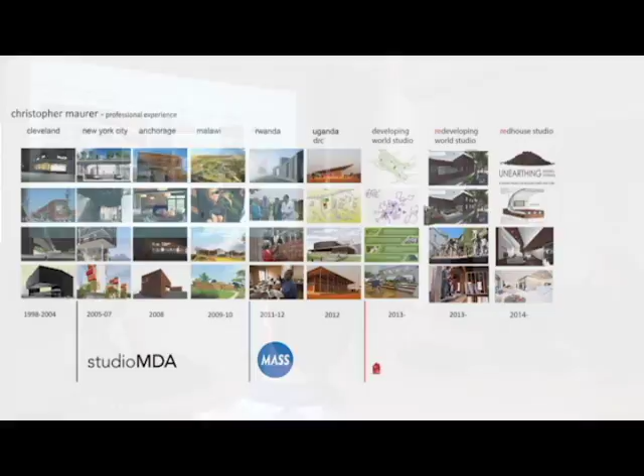My trajectory came from Northeast Ohio. I spent about 6 years in New York City, but worked on some major projects that took me out of the city, from Anchorage, Alaska to Lilongwe, Malawi, and a lot of places in between.

This is the timeline here where I studied at Kent State University. The major thesis project was a design for the MoCA museum that's now been built, not with our design unfortunately, but with somebody else's.

Then in New York City, at studioMDA, I worked for Markus Dochantschi, who was a protégé to Zaha Hadid. He started his firm in New York City in about 2002, I think, and I was there from 2005 to about 2010.

We did some projects in New York that were high-end galleries, low-income housing, and some work that actually took us to Africa. That really developed this sense of interest for me to work in the developing world.

So I took a job with Mass Design Group as their director for their Rwanda office, and we did several projects for organizations like Partners in Health and the Clinton Global Initiative and others like that.

Came back to Cleveland, started the Developing World Studio at Kent. I talked to Dean Steidl and Associate Dean Willoughby, mentioned my work in Africa, and they thought it would be a good opportunity to have a studio based off of developing world issues.

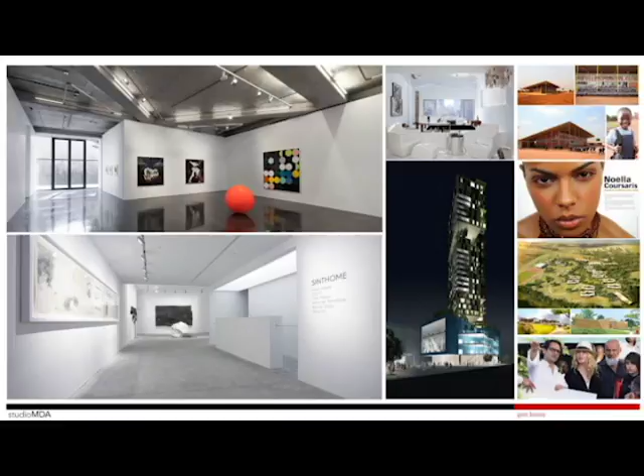And then the work that we did pro bono was usually based around marketing the firm or networking into celebrity causes. You can see Marcus here with Madonna on one of our projects in Malawi, where she was going to build a boarding school similar to the Oprah Winfrey Academy. The top project up here is the Malaika Foundation school for girls that was built for Congolese supermodel Noella Coursaris. So there was a real intentionality about some of the projects we picked there, and even though they were done for free and completely pro bono, they were done in a way that kind of augmented publicity, and that was one of the main reasons for doing that.

At Mass Design Group, the pro bono or the humanitarian impact kind of work was the mission, so that was the basis for design.

With studioMDA, there's a clear break between what's high pay and pro bono. With Mass Design Group, there's a gradation, because we collected fees for all projects. It was important that people understood there was value in the design, so there had to be payment, but most came from developed world partners who had more money to spend.

The ethos here was based on what Paul Farmer did with Partners in Health, which was our fiscal sponsor. In the book Mountains Beyond Mountains, Paul elucidates his concept of the preferential option for the poor, from liberation theology. The idea is that the poor are so commonly marginalized that when we work for them, we should give them even more effort than our developed world partners, because they deserve the respect, and we need to innovate with limited resources to make their lives easier.

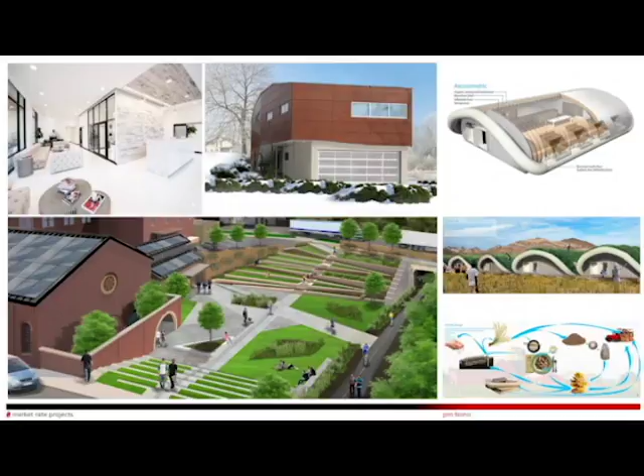So that brings us to Redhouse Studio. I started Redhouse a few years ago. We're now 4.5 people, 4 full-time and 1 part-time. Our market rate versus pro bono projects are on a gradation, but to keep the wheels turning we do have to do more market rate work. In our research we try to promote super sustainable technologies, and even though some of these projects aren't paying yet, we have hope the research will pay off. It's an investment in the future, for good reasons, for a better cause.

So that leads to the topic of the day: designing with limited resources.

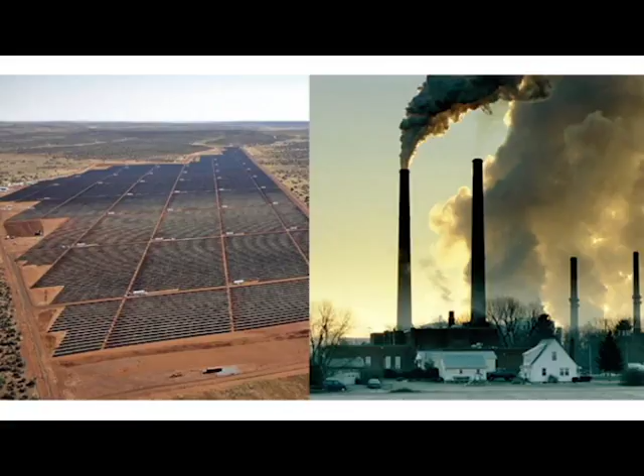In the developing world, there's also opportunity for leapfrogging into new technologies. We have infrastructures like the grid that require large-scale infrastructure to feed our homes and businesses, and factories running on coal and fossil fuels for a long time — not utilizing them would be a huge cost. But when those plants or the grid don't exist in the developing world, there's more capacity for jumping past old technology straight to the new, using renewable resources, ideally off the grid, so you wouldn't even waste the energy that goes into the grid.

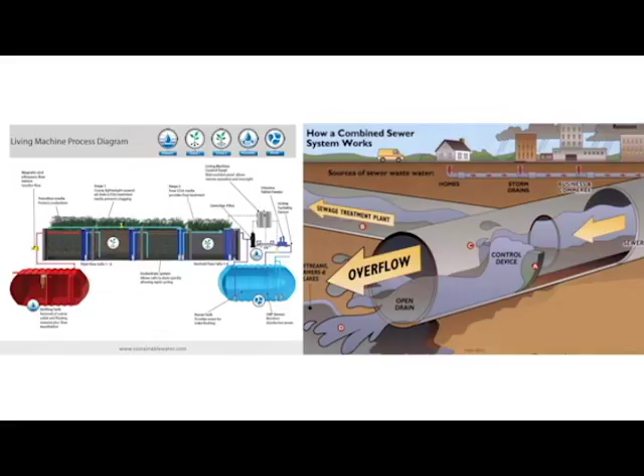Same thing with sewage and water collection. Because there's no grid, no systems like here in Cleveland where we have CSOs that dump sewage into the lake during major storm events — if we decentralize that treatment and do it biologically, like the living machine you see here, we enable the capacity for not polluting rivers and streams, doing things a bit lower tech but in a way that's useful and more sustainable.

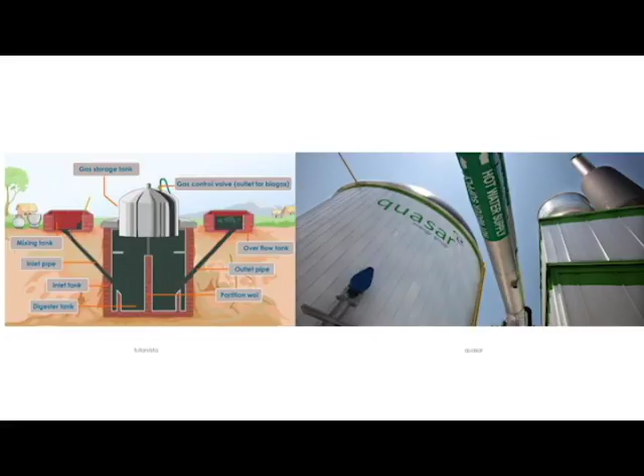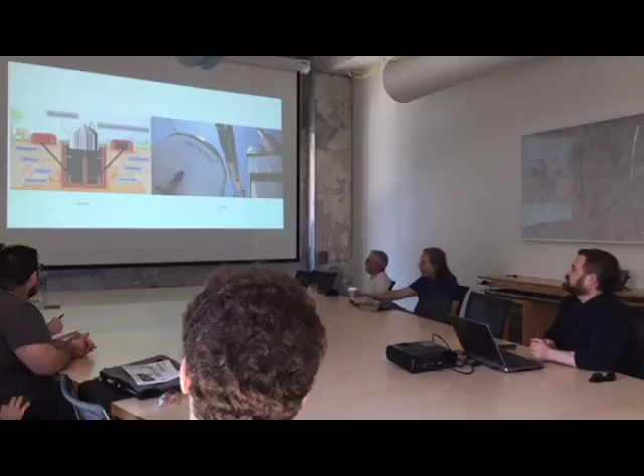We've seen a lot of biogas projects too in limited resource environments, whether rural America, Africa, or anywhere really, that are starting to inform how we produce energy here in the U.S. Quasar is a company in Ohio producing energy from biological waste. Some major numbers to consider: 40% of the world's carbon emissions come from the building industry, according to the U.S. EPA.

534 million tons of construction and demolition waste go to landfills each year in America. That's enough to be 10 pounds per person per day. So every American is throwing away 10 pounds of rubble a day. A room like this with 30 some people in it, that's 300 pounds a day basically.

So I guess the point I'm trying to get to is looking at these limited resource environments and bringing that back to the developed world. I think we need to do that all the time. We need to use that innovation that we aspire to in limited resource environments and apply it to environments that we consider to have many resources. So the point here is that all resources are limited.

The way that we're building, the way that we're using materials and discarding them, is leading to an age of the climate refugee.

In the developing world, that looks like people being displaced because they are not able to reach food resources or the normal necessities of life. In the developed world, you see people barricading themselves. More and more we see that in the United States too—the calls for walls to keep out foreigners, immigration bans to keep out foreigners, to protect the resources we have, whether that be jobs, or in Northeast Ohio, in the Great Lakes region, where we have 20% of the world's supply of fresh water. Areas that do have lots of resources are positioning themselves in this armed lifeboat position, where they have to protect the resources they have.

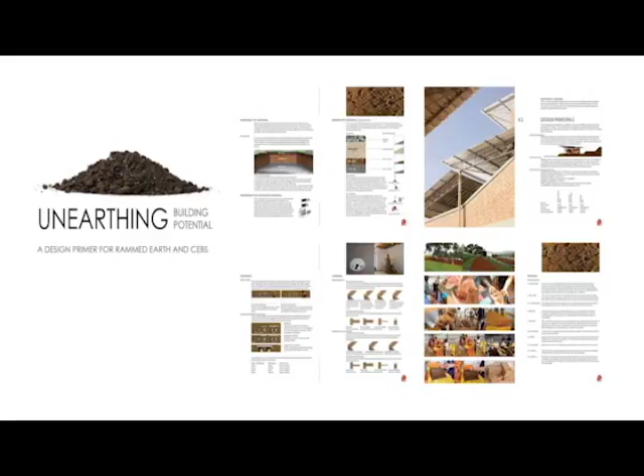So one material I had been looking into, and have written on—this is a manual I wrote for designers like yourselves to work with rammed earth or compressed earth blocks, citing some of the projects we worked on in Africa—and it gave design guidance, soil guidance, and testing of materials guidance for people interested in designing with it. This is a very low resource material. You basically use the earth right under your feet, and in many cases you can just manually compact it to the state you need to build with.

I enjoyed working with it in non-seismic areas. It's actually a really good product, but too many times we try to build with it in seismic areas, and then you have to reinforce it with concrete. It's very bad seismically, and it's not very good thermally either. So I kind of left that lead and moved on to other things.

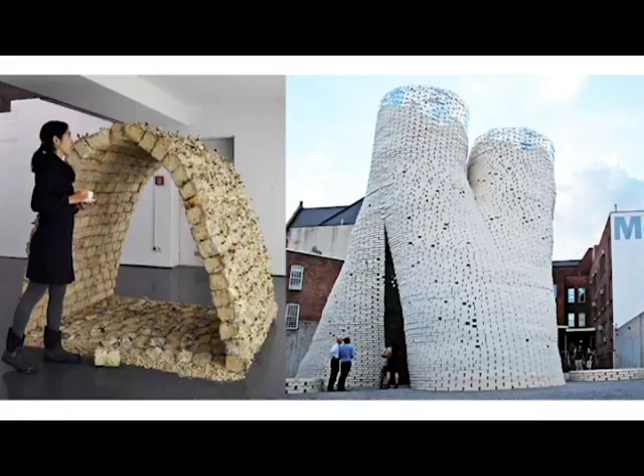Got some help from a couple people in the room, actually—Michaela and Forrest, this is their project that they did in third year. They were in one of my studios for Malawi, and they did an elegant design, as you can see here. But one of the more innovative things they came across was the use of a mycological material. These bricks are made out of basically the waste of mushroom farming. I'll talk about that process in a bit, but the project on the left was done by an artist named Philip Ross, who made these bricks out of reishi mushrooms growing in them.

They actually harvested the mushrooms during this exhibit that was in the Kunsthalle in Düsseldorf, and made tea from them for exhibit goers.

Not only did this impress people with the ability of this mushroom to produce architecture, it also kind of boosted the immune system of a whole town in Germany.

The project on the right was by David Benjamin for MoMA's PS1 competition, and these are bricks made by a company called Ecovative that basically make bricks from mycelium, which is the root structure of fungus.

This is probably the tallest form of the art that's now referred to as mycotecture. So our studio has been looking at that as a great resource for designing in limited resource environments, and that includes just about every environment that we design in.

The process that it takes to produce these materials is pretty simple. If you were to go all the way from root to block, you would take the root structure of the mushroom body, which is called mycelium. That's the vegetative state, basically, of the organism.

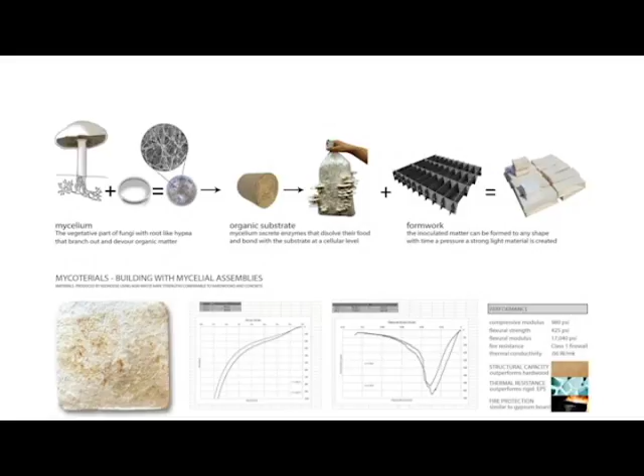The largest organism in the world is a mycelium mat that's 2,200 acres big, and it's in Oregon. So it can grow pretty much indefinitely if it's given enough food to grow.

So you would basically extract that. You can inoculate any kind of organic matter, which you see there, straw. We use sawdust sometimes, we use corn stover, different materials that the mycelium can grow in.

And then what you have with the hand there is a bag that's basically filled with that mycelium, and mushrooms start to sprout out the side.

So if you're the farmer, you're going to harvest those mushrooms and throw away that mycelium. If you're us, you're going to grab that mycelium, put it into something you can compact, and then you can make bricks out of that.

On the bottom left is a material that we made, and there's some structural testing there that shows the strongest ones we've come up with rival hardwood or concrete for their compressive strength.

Commercially produced material that uses this stuff rivals or beats EPS for insulative strength, and it has Class 1 fire protection similar to gypsum board.

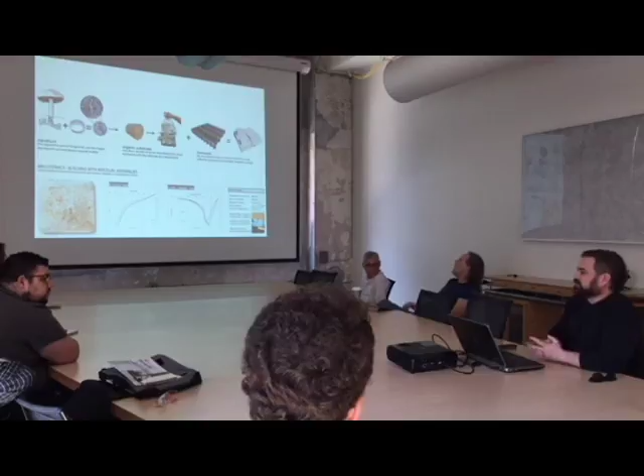So this is pretty much the most multifunctional material that I've ever come across, and I've worked from Kigali to Anchorage and a lot of places in between.

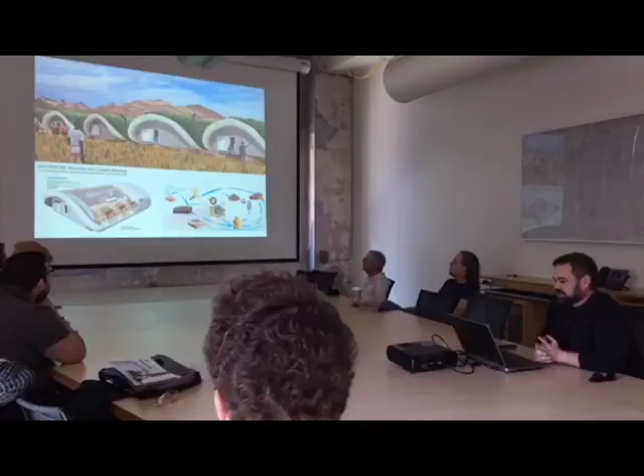So we immediately tried to find ways to utilize this for the problems we mentioned earlier, the climate refugee. What you see here is a proposal that takes an inflatable form that can be delivered to site, erected immediately for secure and defensible shelter.

And then the processes that go into creating the mycotectural shell not only produce a lasting shelter, but also augment food security and water security in their resource loops.

You can see the diagram to the right where you have to produce agriculture. You take the agricultural waste, feed that to the mycelium, and then everything you produce either goes to plates, to market, or to another resource loop, so it can continue on.

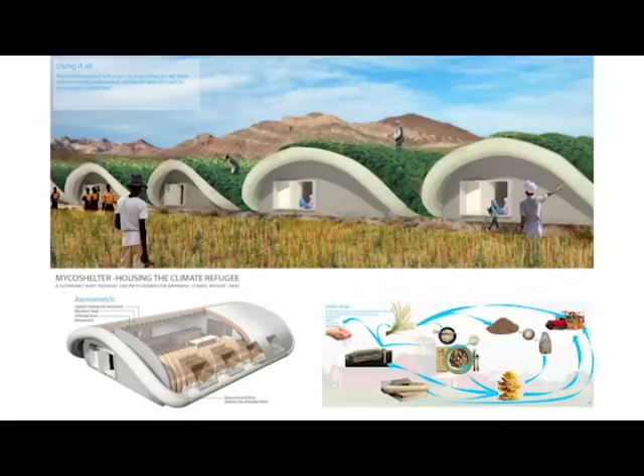So I showed that to somebody at NASA, talking about the material, and showed her some samples that we made. She said she often designs in limited resource environments as well, and she's an astrobiologist who's been doing a lot of work for the Mars missions based around cyanobacteria.

Cyanobacteria is a type of blue-green algae that produces oxygen and can be used to produce energy as well. We're working on a project right now where we're going to pair that cyanobacteria with mycelium.

Basically making this shelter-in-a-bag idea that you can go into space with very little resources on the shuttle, and then when you get to Mars you can unpack that into thousands of pounds of building material.

It costs about $10,000 to put 1 pound of material in orbit, and Mars is much, much farther than going into orbit, so we're talking hundreds of thousands of dollars to get a pound up there.

So if you can go into space with a couple of petri dishes and make thousands of pounds of material when you get there, you're going to save NASA a lot of money.

As I mentioned, it can also produce power. The cyanobacteria can produce oxygen, which is good for breathing. It can also produce hydrogen, and if you have hydrogen and oxygen, you can power fuel cells. And the waste material from that actually is water, so that goes back into the waste resource loop.

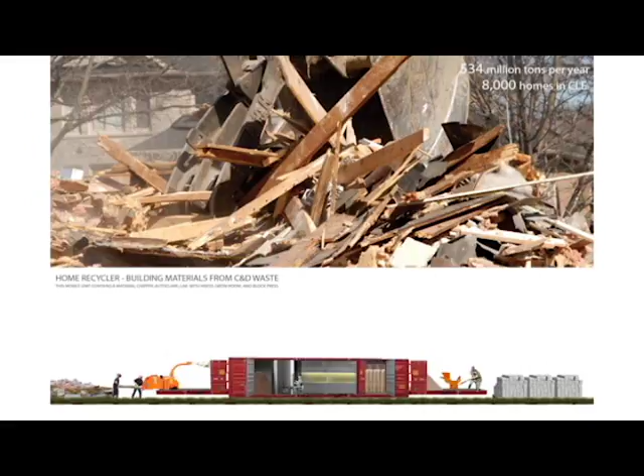And we could build blocks, we could build walls, we could build arches, we can build all kinds of things out of this waste material.

And we're looking at a project coming up that's basically going to have a demolished house on one side of our container, and then a sculptural house on the other side made out of this material. So kind of highlighting the processes and talking about some of these issues, like the millions of tons of waste that go to landfills each year that could be used in other ways.

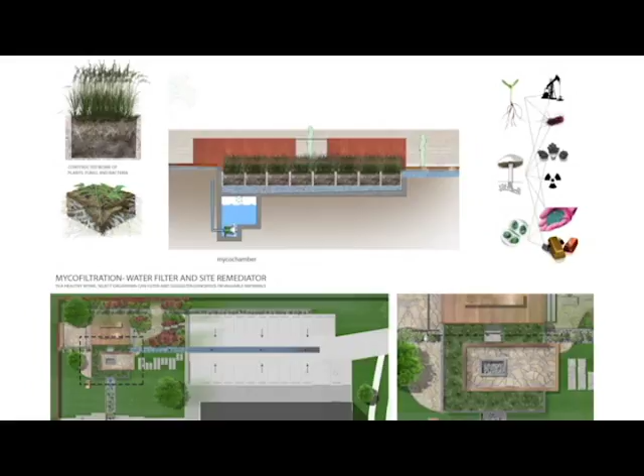In researching this, we also found a lot of the bioremediation qualities in fungi. So a lot of bioremediators now are basically looking at petrochemicals and even some biological toxins. But when you add bacteria and fungi to the equation, you can actually capture, sequester things like heavy metals like lead, or valuable materials like copper or potassium. It can even neutralize or bioaccumulate and safely sequester things like radiation.

A major issue here in Northeast Ohio is lead. So that's one of the projects we're trying to promote. This is a remediation garden that we're doing for a gym in Midtown, but we're actually going to use it as a testing facility for other toxins that we can introduce into controlled areas to show the efficacy of this.

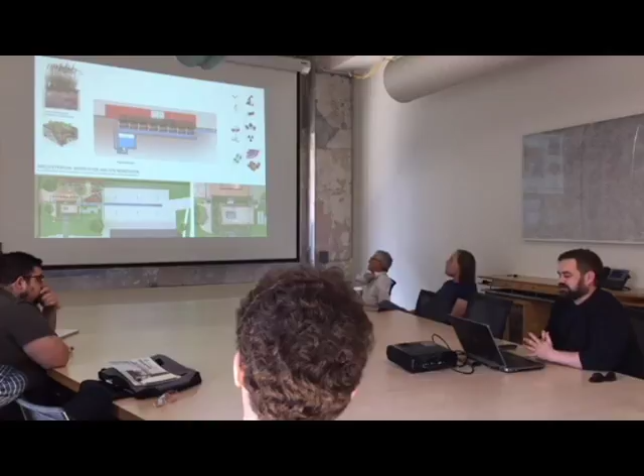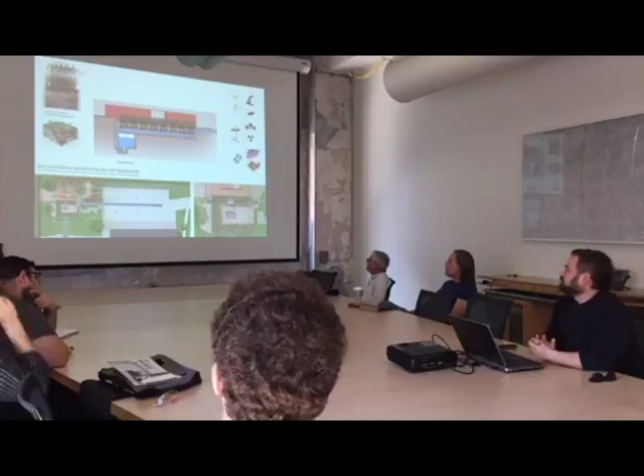We'll have a real-time placard that shows water quality that's been run through the chamber versus a control. And like I said, we can add toxin, like lead debris, into certain areas under control and show how we can accumulate that and extract that, bring that back out, and safely dispose of it.

There's also an issue with our combined sewer overflows that put raw sewage into the lake. It contains a lot of phosphorus that the algae eat. I don't know how much you guys know about this phenomenon, but it actually has been poisoning people over the last few years. In Toledo, there was a major problem with the drinking water. In Lake Michigan and other places, it's led to botulism in the wildlife. It really chokes the wildlife, including fish and birds in all of the Great Lakes regions.

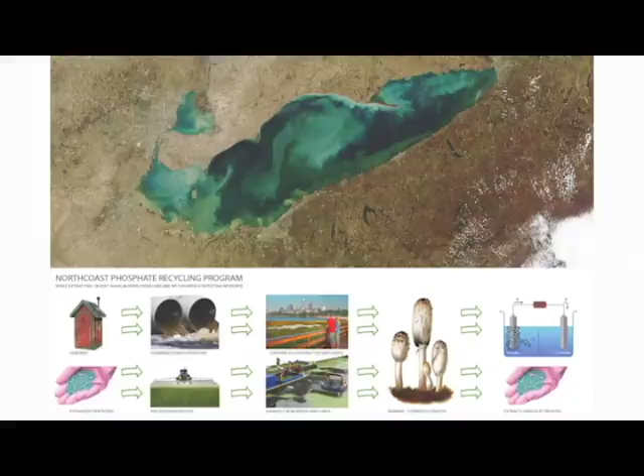So this is a huge blight, it's a huge problem for our ecologies. It's being experimented and tested with now, but we're not finding ways to stop it. So one way to look at that is maybe we could see the benefit of that material, and if it becomes a resource for us, then maybe its extraction or capture could be feasible in different avenues.

So what we're proposing down here along the bottom is that the water that goes into the lake can either be captured in constructed wetlands, like you see in the top middle picture, or harvested by barges and scoops to collect some of the material and bring it to shore.

And our friend there, Coprinus comatus, also called the shaggy mane, has the natural ability to bioaccumulate phosphates. It's not the only fungus that does it, but it's the only legal one that I know of — a lot of psychedelics are pretty good at absorbing phosphates too, but we could probably get more political will behind this one.

It has the actual benefit that it bioaccumulates the material and disintegrates shortly after it fruits. So this thing can disintegrate into a liquid that we'd put into a slurry, and if you ran electrolysis through it, you could pull the ionized phosphates out rather easily, giving you a large concentration of phosphates that could then be recycled.